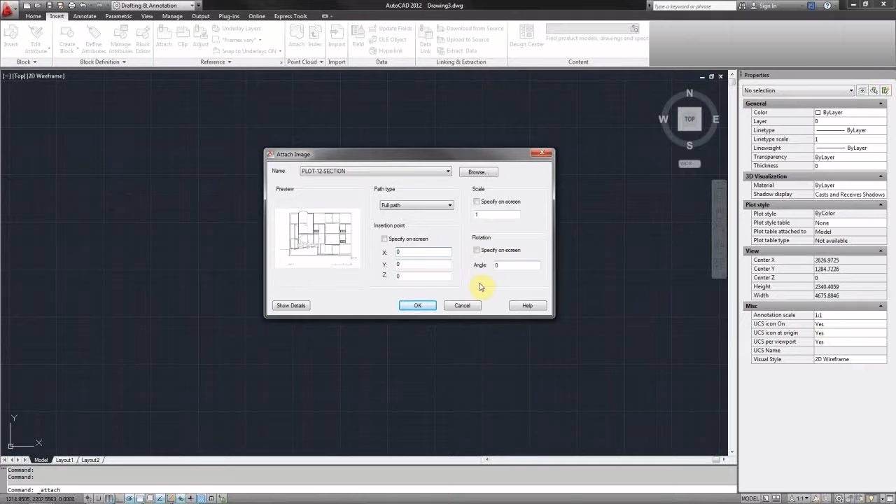Scale, we don't need to adjust because we will do that once we import the image. Rotation should be fine as well. So we'll just say OK. And then if we zoom out, we can see the image here at our origin.

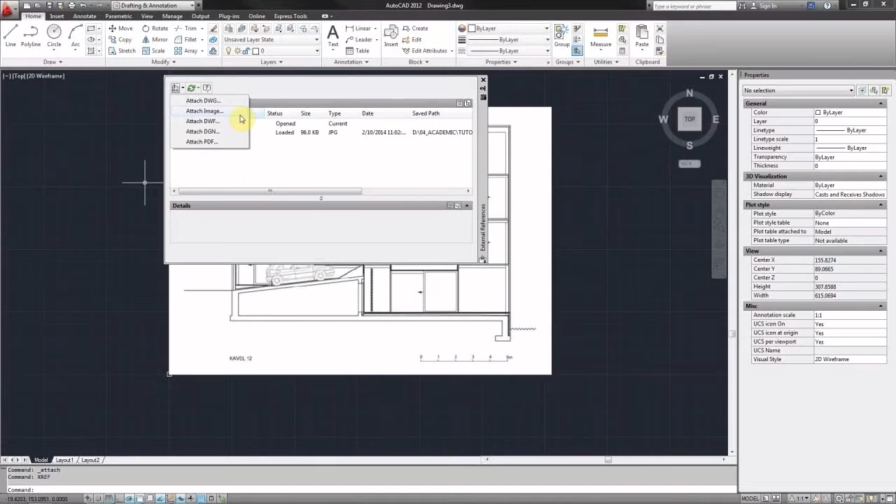The other way we could have imported that is by typing xref and hitting enter, and then we get this dialog box. And if you click on this pull down next to the DWG icon, it allows you to change to attach image and a few other options as well. So if we attach image, we basically get the same options of navigating towards our image.

So now we have our image. The first problem is it's quite bright. I can barely see my cursor over top of it. So to fix that, I'm going to select the image, and AutoCAD automatically switches to the image tab where I can adjust this fader and basically turn down the contrast in this image, allowing me to see my cursor and line work on top of it much easier.

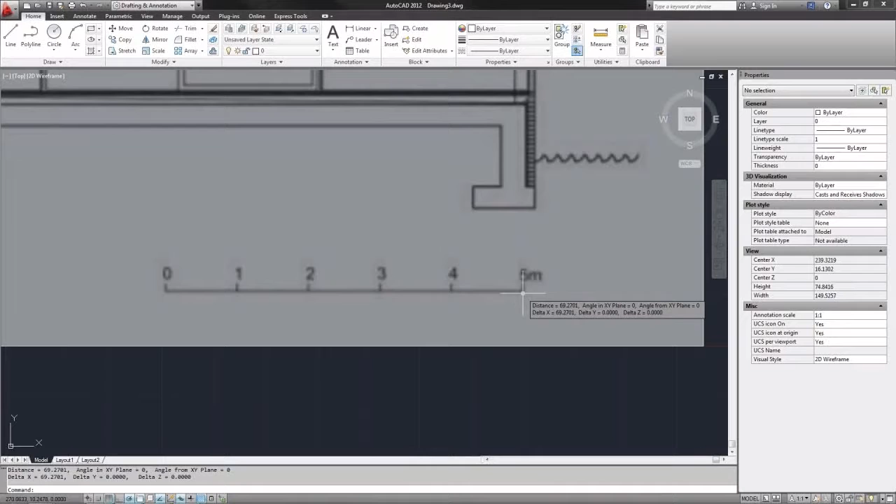So next we will try to figure out how big this image is. We can use this scale here in the bottom of the image. We can go ahead and measure it, typing distance, and click one end of the scale, and then click near the other end of the scale, and that says 69.2 millimeters. So that is very small in comparison to what we actually want, which is 5 meters or 5,000 millimeters. So rather than doing the math and multiplying this image by a specific number, we can scale by reference.

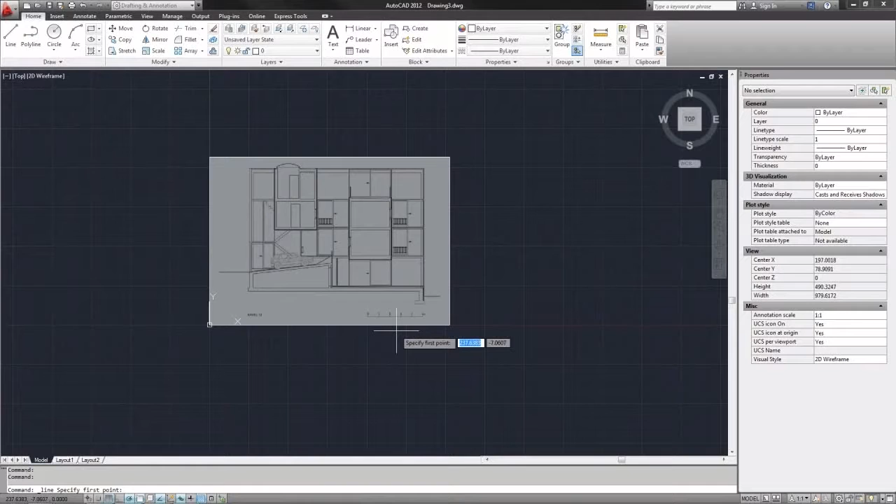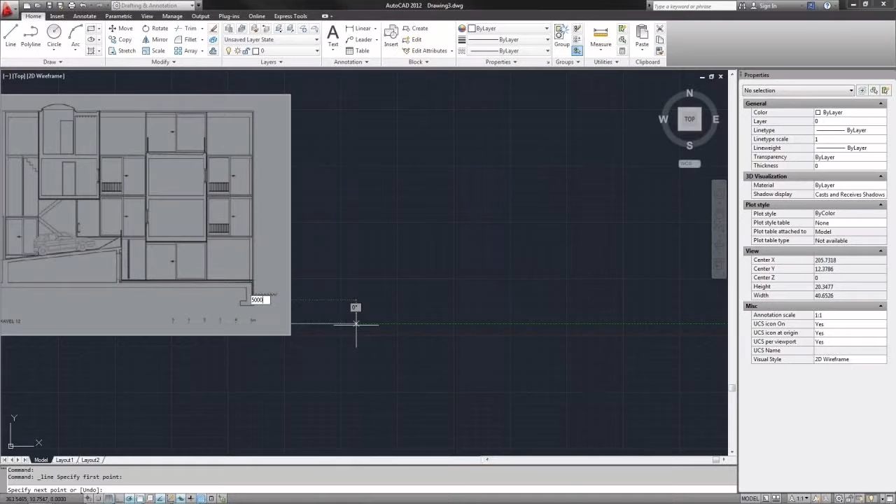So what I would do first is create a line of reference, basically a line that's 5,000 millimeters long or 5 meters long, which is what I want this part of the image to be when it's all scaled accurately. So I will get as close as I can to one end of the scale in the image. Then I will draw a line that is 5 meters long or 5,000 millimeters. And if I zoom out, I'll hit enter to complete the command. And you can see this line represents actually 5 meters.

So next all we have to do is scale up this image so that the scale in the image matches the 5 meter long line. So I will select the image and then go back to my Home tab at the top. In the Modify tools, you'll find Scale. If I click on that, down at the bottom here, it's asking me to select my object. And I want to scale my image, so I will select the image and hit enter.

And now at the bottom it's asking me to specify a base point. That's basically the point around which I want to scale the object. So I will use the starting point of my line, which is also the starting point of the scale in the image. I will click there once, and now it's saying specify scale factor, and then in parentheses it says copy or reference. In those brackets, those are my two additional options.

I can choose to scale this as a copy, which I do not want to do this time, or I can scale it with reference, which is what I want. So in order to activate one or the other of those commands, I could type C for copy or R for reference. So I will type R for reference and hit enter. Now it's asking me for reference length. My reference length is the length of the scale in the drawing. First I will click one end of my scale, which is also the base point of my whole scaling operation.

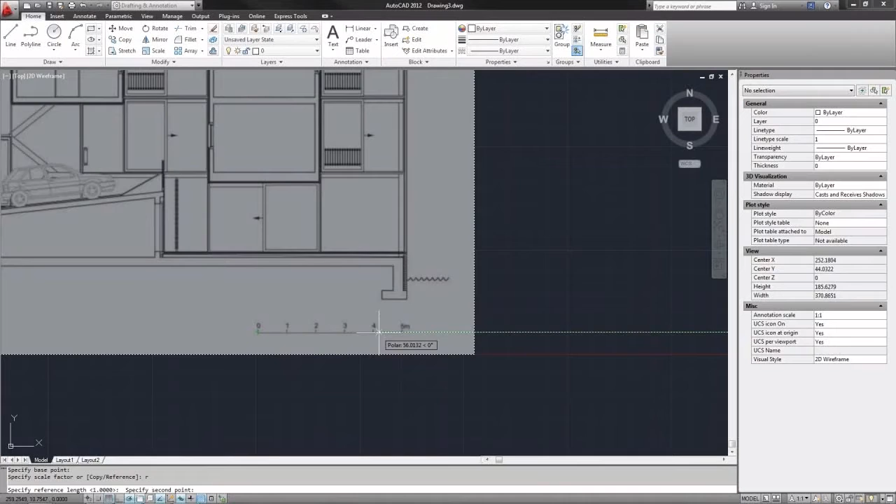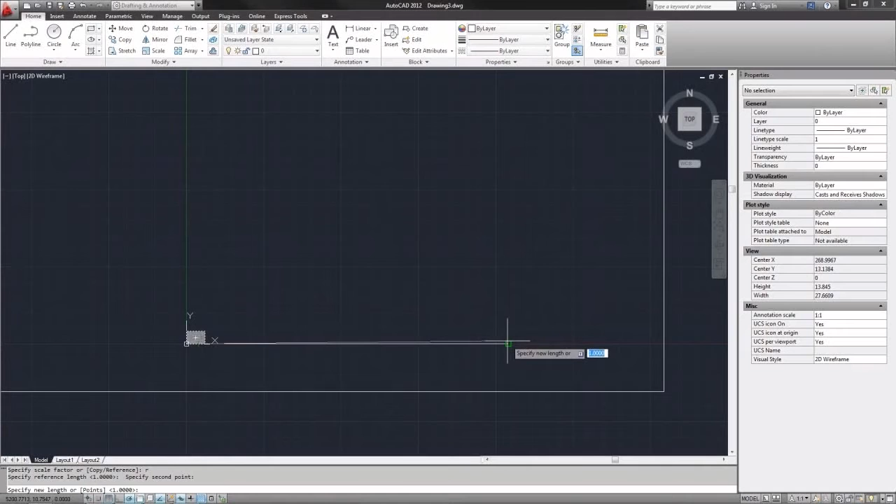Now it's asking for the reference length, which is the length of the scale in the raster image. So I will get as close as I can to the other end of this scale and click a second time. Now you'll see it's asking for a new length, and the new length is the length of my 5 meter long line. So I will snap to the end of that line, and now as you can see, my 5 meter long line and my 5 meter scale in the image are exactly the same.

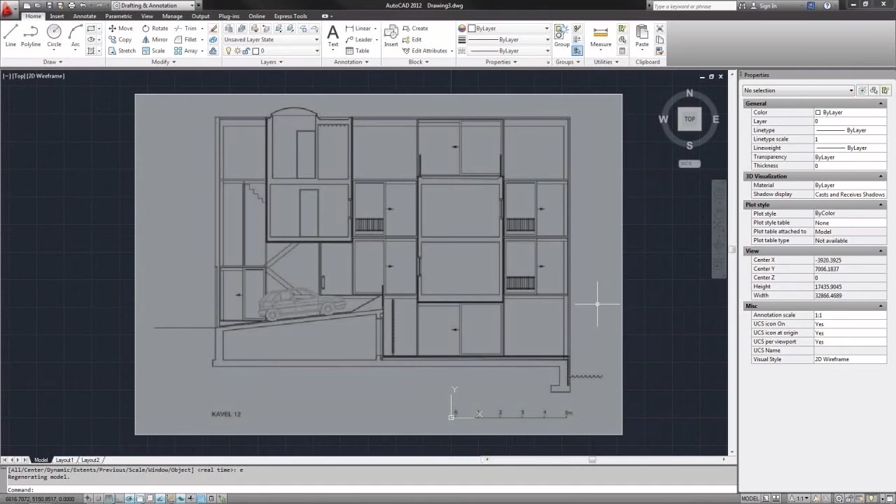And from here I can set up a few layers and then begin to trace over this image and recreate this as an AutoCAD drawing.